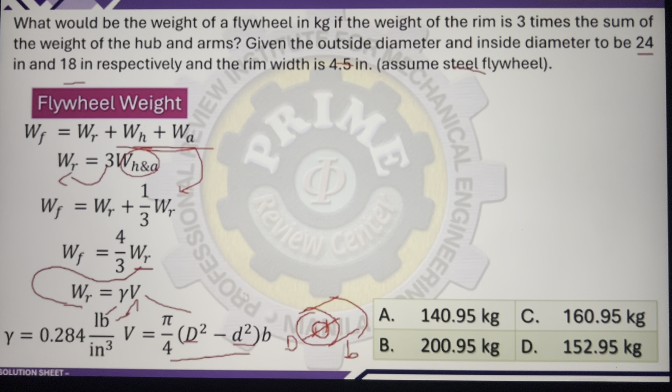So therefore, yung weight ng flywheel is 4/3 times 0.284, which is gamma, times the volume, pi/4 times 24 squared minus 18 squared, times 4.5. Pwede mo na i-cancel out yung units kasi parehong inches. Cubic inches, so common unit ay pound. Okay, so computin natin yung weight ng flywheel in pounds. Then, saka natin kukomputin sa choices.

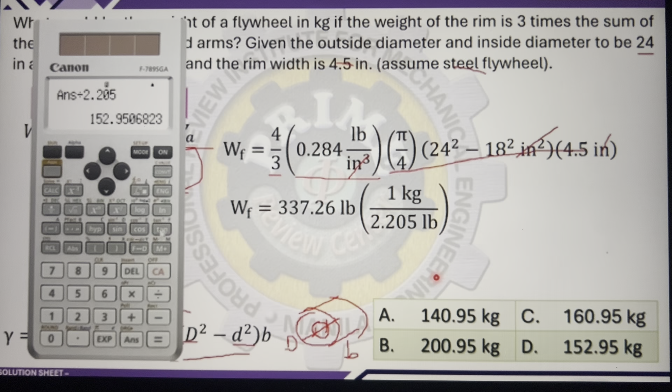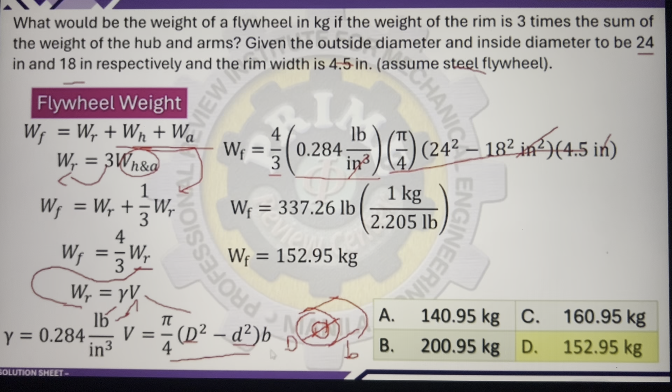Sige, so another problem sa flywheels natin. So, basahin ko lang. Steel flywheel of 6 feet diameter has to absorb 2,400 ft-lb of energy and maintain a coefficient of fluctuation of 0.10. If the mean rim speed is 80 feet per second and the effects of the arms and hub account for 10% of the rim weight, calculate the approximate cross-volume of the rim.

So, naghanap ng cross-volume. So, kapag naghanap tayo ng volume, kailangan makuha mo yung weight. At sabi nga natin kanina, in solving the weight, we need to assess the problem if that weight can be solved by kinetic energy or specific weight, diba? Or rather, yung density times gravity. So, since sa problem may given na absorbed energy, that is the kinetic energy ng flywheel, then to solve yung weight ng flywheel, we will be using yung kinetic energy.

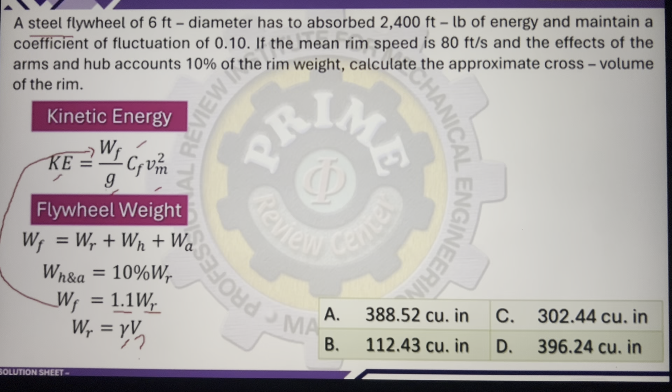Diretso. Magiging 1.1 times weight ng rim, which is gamma times V. G is constant. Coefficient of fluctuation is given, same with the mean speed and the kinetic energy. So, therefore, direct solve. So, pag nilagay mo lahat ng values, ito yung kinetic energy, 2,400. Ito yung 1.1 times gamma, 0.284. Volume, yan yung hinahanap. Acceleration due to gravity, G. Coefficient of fluctuation, then the mean velocity. So, computin na natin si volume.